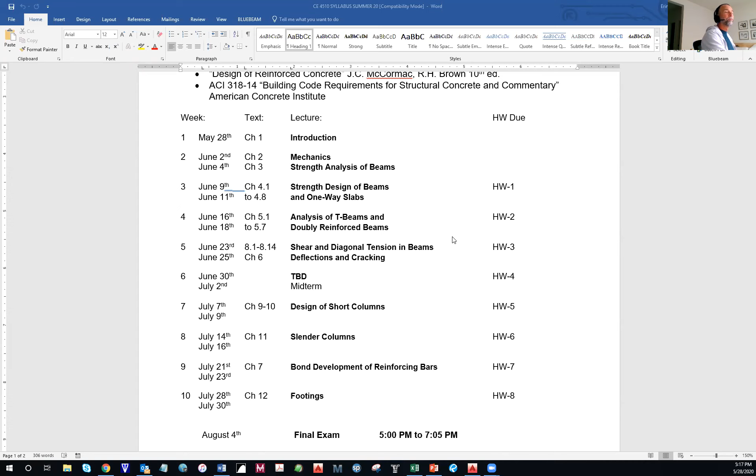So this is the homework schedule. The midterm is on July 2nd, and the final is on August 4th. These two dates don't slide - it will be on July 2nd, it will be on August 4th. So if you have family vacations or you're hoping to jump to Tahiti or something, just make sure you're not gone on these two days.

Okay, any questions so far? No, good. Okay, let's jump down here.

Okay, so the midterm, you have 2 hours to complete. The final, you'll have 2 hours to complete.

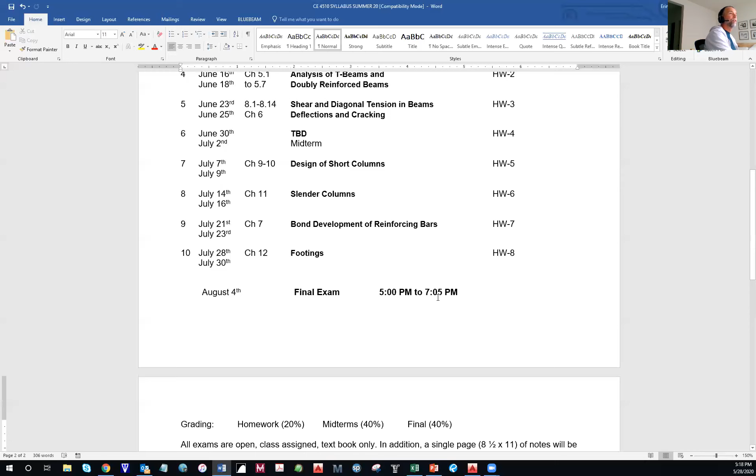Okay, grading for this class. We have homework, as I mentioned. The homework will be 20% of your grade. The midterm will be 40% - that's the only midterm, there's only one. And the final will be 40%.

Okay, so for the exams, they are open, class assigned, textbook only. You're going to be doing this in front of a webcam with Respondus. You're going to show me your desktop and what's there. And what can be there is your textbook or a printed out version of your textbook.

And a single page, 8.5 by 11 of notes will be allowed. The notes must be handwritten, no pictures, printed material, or examples allowed. It's basically just shorthand crib notes to help you find things during the test. Again, no pre-worked out problems, no examples, and definitely no printed material.

This note page that you're going to have, you're going to turn that in with your exam. Compromised tests will not be credited.

So what we did last time is I actually created an exam through Respondus, and the exam has PDF sheets that have the problems. And then the exam has text boxes that you put your answers in. I usually do 3 or 4 problems, and each problem has 1, 2, or 3 parts to it. So you give me the answers in the text box.

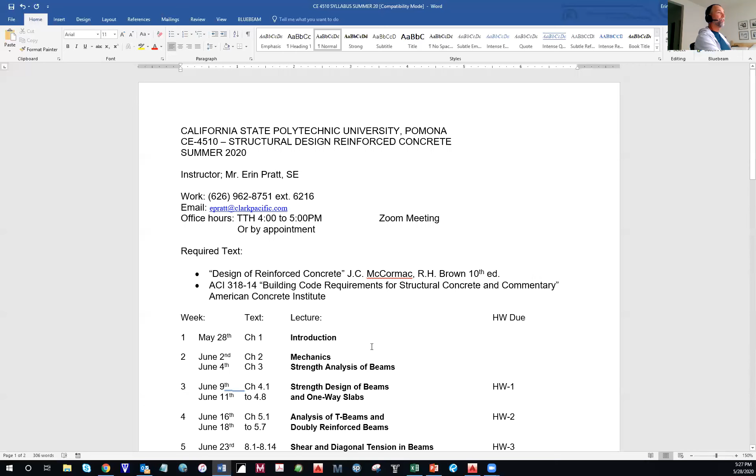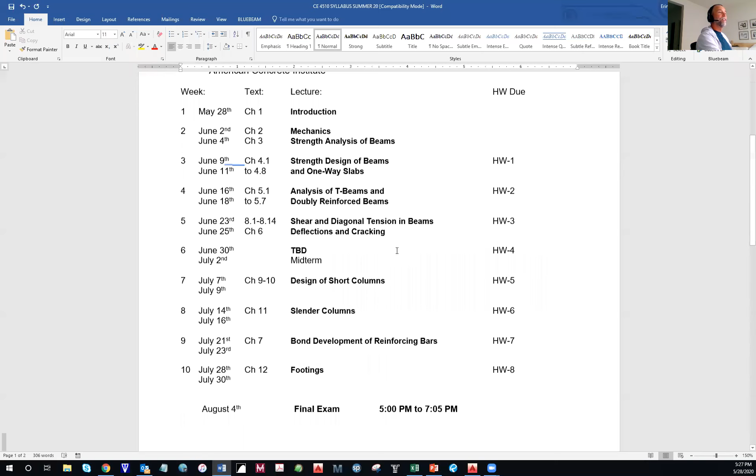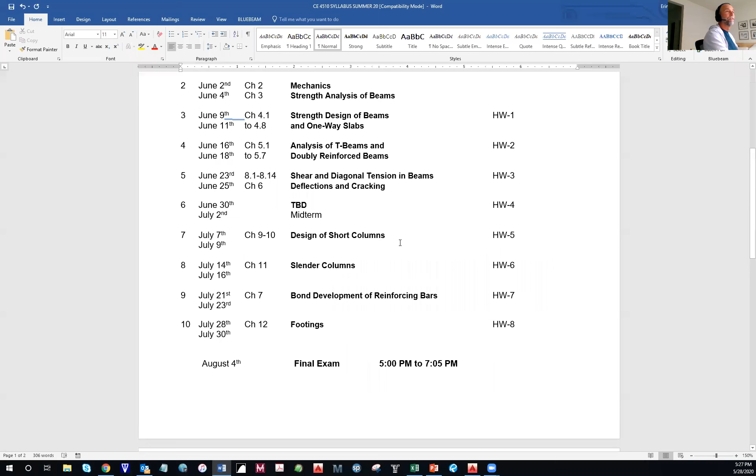Okay, so any questions at all about what we're doing? Okay, so that's the syllabus. If I refine some of the scheduling down here at the bottom, I'll repost this and let you guys know that it's been revised as we're moving along. But at least until the midterm, all of this is pretty set in stone.

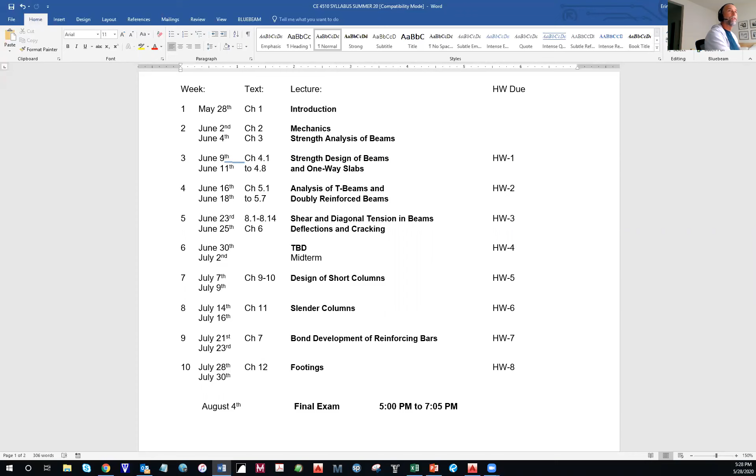Okay, so that's the syllabus. I think the way we're going to do this class basically goes from 5 to 7. I think what we'll do is go from 5 to 6, then take like a 10-minute break, and find a convenient spot to break. I'm going to try to work in a 10-minute break for the 2 hours, since 2 hours can be long if you just drank a lot of coffee or something. So does that sound good to everybody? A 10-minute break in the middle? Yeah, that's fine. Okay, great.

Okay, lecture number 1. I'm trying to think if I'm forgetting anything before we dive into concrete design. Well, I'll interrupt myself if I remember anything else. Okay, so lecture number 1: why are we here? We're here to learn concrete design. Today is just the fluffy, warm and fuzzy introduction before we really get into the good, interesting stuff. So starting as an introduction, we start with our materials.

Our materials are concrete. Of the concrete, we have 4 basic materials: sand, or otherwise known as fines; aggregates, or coarse aggregate; water, of course; and cement. Those are the basic 4 ingredients of all concrete designs. And in this modern day, more often than not, we'll see some admixtures added in.

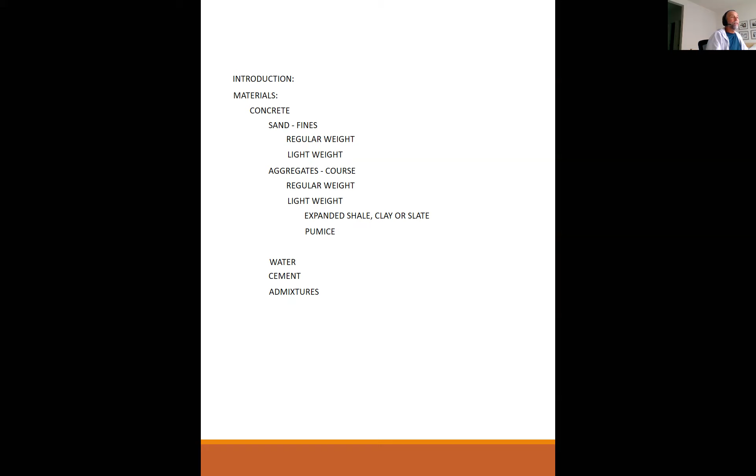That rock does have less shear capacity than regular natural rock. In other words, if you try to shear it, it will shear through the rocks themselves easier than with regular weight material. But there are pretty good advantages to using the lightweight material, namely the weight of concrete is dramatically reduced. We'll get into that a little bit later.

Water and cement together form what's known as a water-cement ratio.

The water-cement ratio is a very important concrete design item, but this is for the mix designs. I want to be clear that this is just background information right now. Mix designs are different than concrete design. This course is really going to be about concrete design, not mix designs. You may or may not have already had a concrete lab where you talked about concrete designs or mix designs, and that's where the water-cement ratio comes in. So again, this is just background information. As a structural engineer, generally you're not going to be too concerned about how the concrete achieves the properties you need. That's usually somebody else's problem, but this is how they do it.

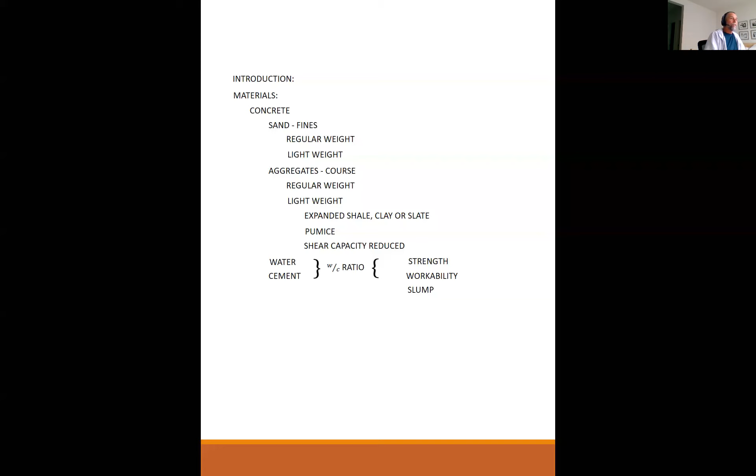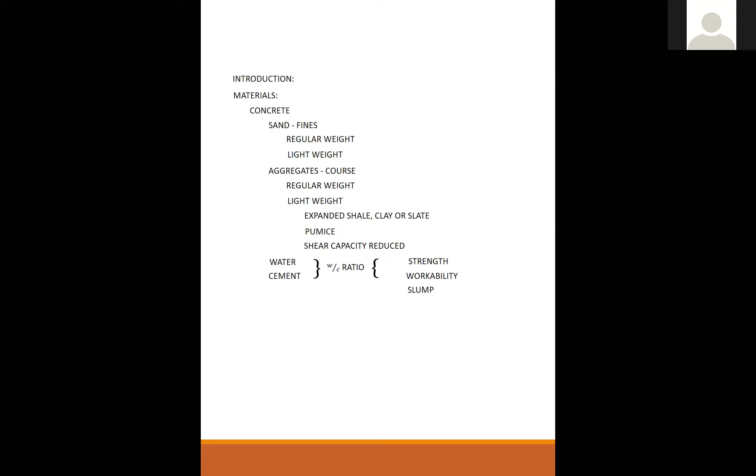Does everybody know what slump is? What does that measure? Isn't that the cylinder test where they put the concrete in, then flip it over, and see how much it goes down? That is exactly right. They have a cone that they use at the job site, and they fill the cone up with wet concrete.

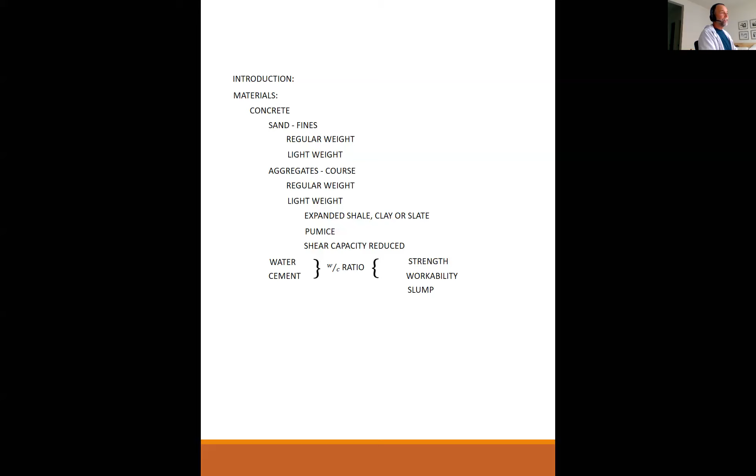They flip it over onto a plywood piece of board or something, then pull the cone off, put it next to the pile of wet concrete, and measure how far from where it started it slumped down. How far did it go down?

Some general numbers: 4 inches is a low slump, pretty high strength but low slump. 5 to 6 inches is kind of normal - I think you need about 6 inches to even pump concrete. Then 8 to 10 inches is more on the workable side; people placing concrete love it when it's 8 to 10 inches, that makes it really easy. More than 10 inches, I think you're pouring a sidewalk. And so that's the measure of slump.

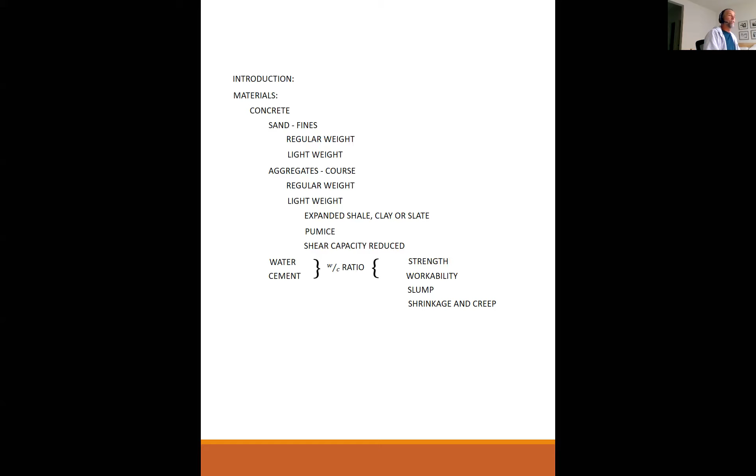The water cement ratio also will greatly affect shrinkage and creep. If you're pouring, say, a slab for a warehouse and you don't need a whole lot of strength, but if you get a lot of shrinkage, you're going to get a lot of cracking. So you might want to check that water cement ratio, not for the required strength, but just to put some control on shrinkage and creep.

Okay, any questions so far?

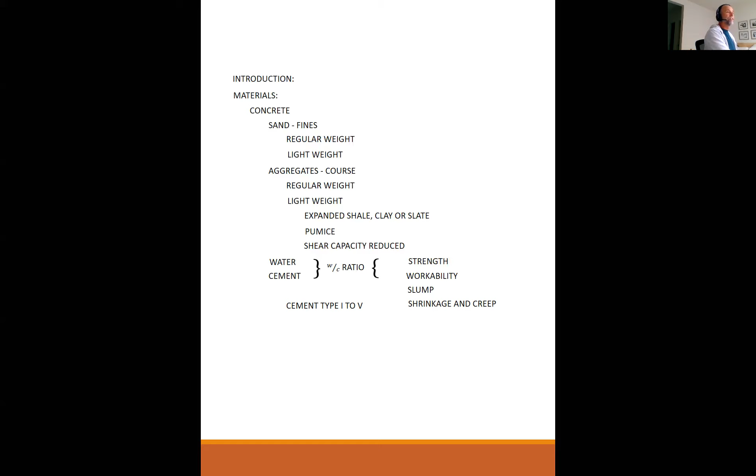Cement comes in 5 different types - these are ASTM specs for type 1 to 5. Type 1 is common all-purpose. Type 2 is lower heat of hydration than type 1, and it also offers medium sulfate resistance. Sulfate resistance, that is basically a chemical attack.

It is sulfates that are in the rock or in the aggregate or in the sand. What will happen is those sulfates, when mixed with the water, will cause problems down the line. They'll cause all kinds of micro cracking, and your concrete can literally just fall apart if it is susceptible to sulfate attack.

Lots of great examples - you can walk around older structures. There's a lot of it in downtown LA. In fact, if you drive any of the freeways going into LA, especially around LAX, I've noticed it a lot - concrete is just falling apart. Really, that was a sulfate attack over the last 30, 40 years since that was put in.

All you can do for sulfate is try to source better rock or better sand, but a lot of times that's not economically feasible because you have to use what's close to you. So your other option is to get a cement that has some sulfate resistance to it. That's another reason to use type 2.

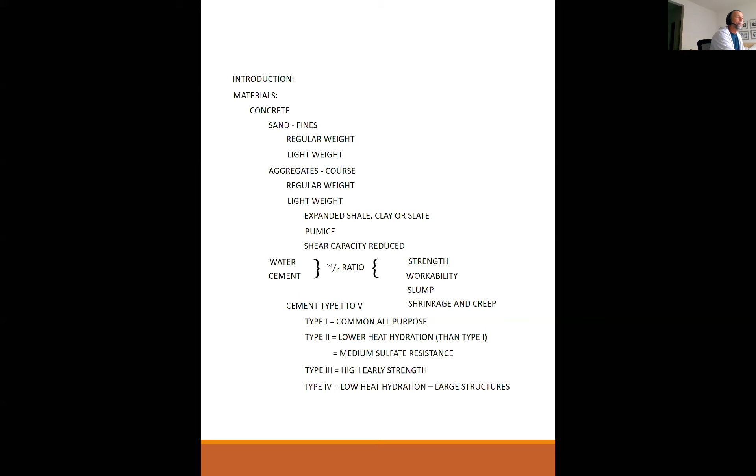Type 4 is low heat of hydration for large structures. Picture something like the Hoover Dam, where that was a massive structure - even with a low or high water to cement ratio, it still generated tremendous amounts of heat from its own chemical reaction between the cement and the water. That heat can actually get so hot that it's detrimental to the curing of the concrete, and you actually cook the concrete. There's different ways to attack that - one of them is using type 4 low heat of hydration cement.

And then type 5 is high sulfate resistance, the best sulfate resistance you can get. Any questions on cement type?

Again, this is just background information. You as a structural designer designing concrete structures generally would not worry about this stuff. This is something that the contractor would worry about, because if this structure is susceptible to sulfate attack, it's their name that's on the line. The customer is going to come back and say, hey, you built this thing and it's fallen apart. It's the contractor's problem, but the engineer should be aware of these issues as well.

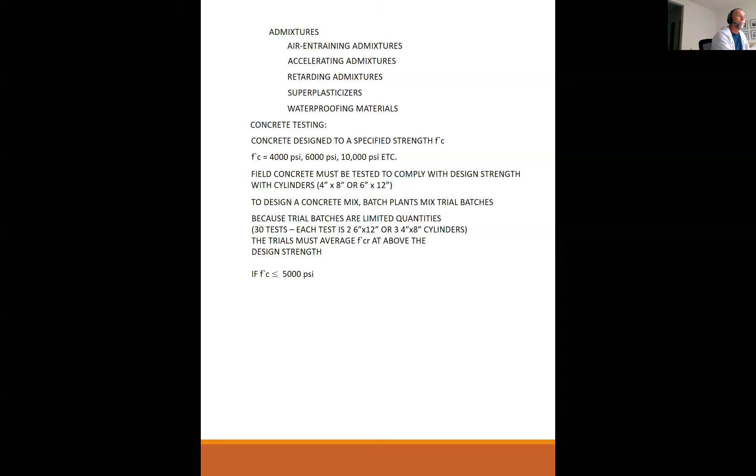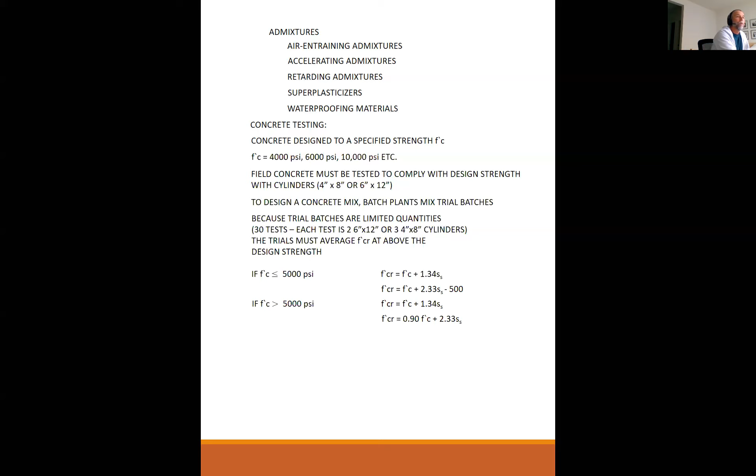Trial batches must average an F prime CR at or above the design strength. If your design strength is less than or equal to 5,000 PSI, your achieved average strength F prime CR has to equal the design strength F prime C plus 1.34 times S sub S - S sub S being the standard deviation of your data - or F prime C plus 2.33 S sub S minus 500. If your concrete is high strength, over 5,000 PSI, the criteria is F prime C plus 1.34 S sub S, or 0.9 F prime C plus 2.33 S sub S.

So the site testing is acceptable if... let me slow down. This is the requirement of a batch plant. Say I'm a ready mix company contracted to provide 4,000 PSI concrete. I will design the mix, then create 60 to 90 cylinders. I break all 60 to 90 cylinders, and the average of all those cylinders has to equal or exceed the greater of these two values, in order for my mix design to qualify as a 4,000 or 5,000 pound mix. Does that make sense?

Could you explain that again, please? Sure.

Somebody dropped out. There we are. Okay, absolutely. Okay, so again, you're the structural engineer.

You say, I need 4,000 PSI concrete, and that's it. You put it on your drawings, F prime C equals 4,000, and that's all you do. The batch plant that is contracted to provide the concrete has to prove before the very first delivery truck shows up that this mix design they've come up with will perform on the job. Because imagine how disastrous it would be to be pouring a 70-story building, you're 30 floors off the ground, and the concrete at the ground floor is not coming to strength. What a nightmare that would be.

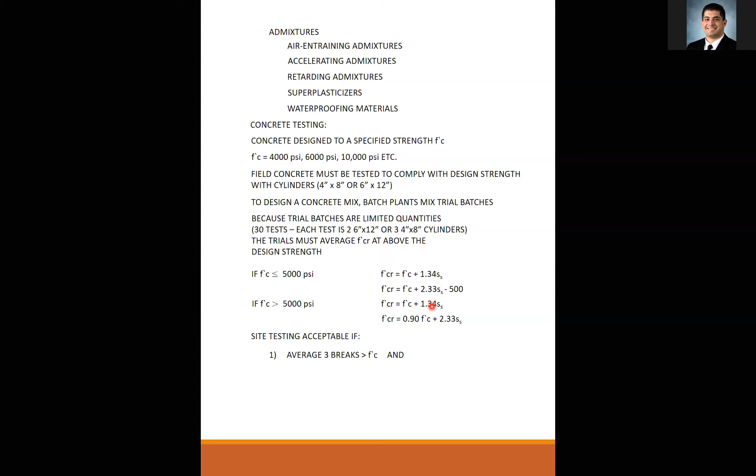Okay, thanks. Okay, so site testing now. Now we've moved from the batch plant, and the batch plant has their own quality control. Now we're talking about quality control at the job.

Now the trucks are rolling up to the job site, they're pumping the concrete onto the building, and we're taking cylinders from the actual job concrete. So the cylinders that you take at the job site, if you average 3 breaks greater than F prime C, and you have no one break that is less than F prime C minus 500 for less than 5,000, or no one break less than 90% of F prime C for greater than 5,000, then you're okay. Your concrete has made the cut for the actual job site.

And what happens if it doesn't? Does anybody know? Don't they do like a mock-up, not acceptable?

So what happens is QC, the deputy inspection at the job site, will write up a non-conformance. That's what it's called. They write up a little ticket and say, hey, we're looking for 4,000, and you had 2 breaks that were under 4,000. We got a problem here.

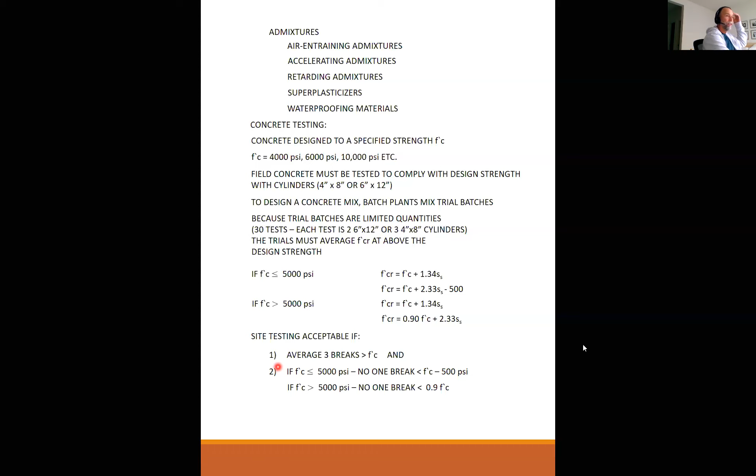And then what they usually will do is say, okay, let's wait till 56 days and see if it comes up. And if it doesn't come up - now this is pretty darn rare, thankfully, because of all this work we did up here - but things happen, it does happen. Accidents happen. Somebody double dosed the water, double dosed the super plasticizer, or it sat in the truck in traffic too long. Things will happen.

And so if you can't resolve the low strength or non-conformance, then it goes back to the engineer of record. That goes back to you or I as a structural engineer and says, we got 3,800, you wanted 4,000, can you make it work? And then it has to go there.

Professor, if it reaches that point, would you try to retrofit it, or would you try to destroy it, take everything out? Yeah, great question.

Now it kind of becomes the realm of the engineer, and each engineer, each firm, has their own policies on how to deal with it. It really becomes job specific. Like in this case, I could justify it at 3,500, we're okay. Or this is hidden in an area of the building, nobody's ever going to see it, so why don't we just pour some more concrete and thicken it up to make up for it? Or this is a very important architectural feature, you guys screwed it up, there's no way the architect's going to let you change it. Demo it out, get rid of it.

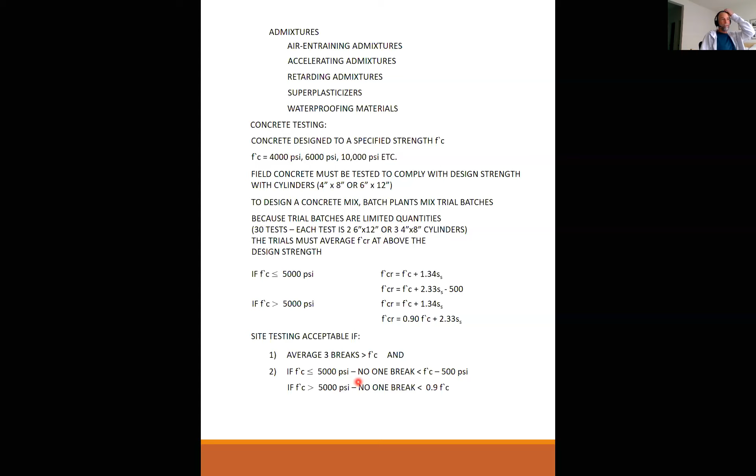There's a job in San Diego about 20 years ago where they were pouring a shear wall. They poured the shear wall, stripped the forms off, and you could walk up to the wall and look right through it because there was a giant rock pocket about 10 feet long and about 12 inches high, just like a big giant seam of no concrete. Of course, the contractor went begging to the engineer of record, please, please, let us patch it, can we grout it, can we re-pour it, what can we do? It was a shear wall, a structural wall for earthquake resistance. The engineer said no, this is worse than I've ever seen, tear it out. They had to jackhammer out this entire wall, 2 feet thick, 40-50 feet tall, 50 feet long. Had to tear it out. So it does happen.

Okay, any other questions before I move on? Okay.

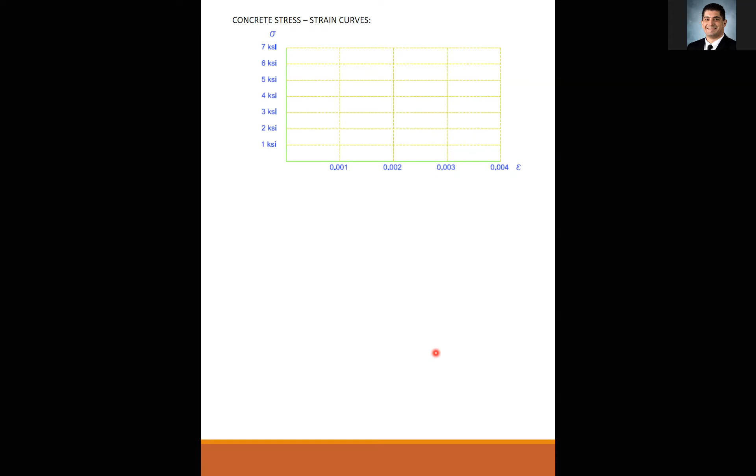Professor, I have a question. Just to clarify, on the site testing acceptable, where it says f prime c is less than or equal to 5,000 psi, and then it says no one break, is that referring that there's no breaks under that psi?

Okay, let me clarify. For every set amount of yardage that you pour, I'm not sure of the exact number, say every 75 cubic yards of concrete poured, you have to take 3 cylinders, break those 3 cylinders, and record the results. Say you want 4,000 PSI concrete and you got 42, 48, and 43. No problem, all 3 breaks are above 4,000, no issue, they write it in the report.

But let's say you had 38, 42, 46. The average of 38, 42, and 46 is still over 4,000, so we're okay with the average. But that one break was 38, still higher than 4,000 minus 500, which is 3,500. So if the average is better than f prime c, and you didn't have any single break less than f prime c minus 500, then it is acceptable.

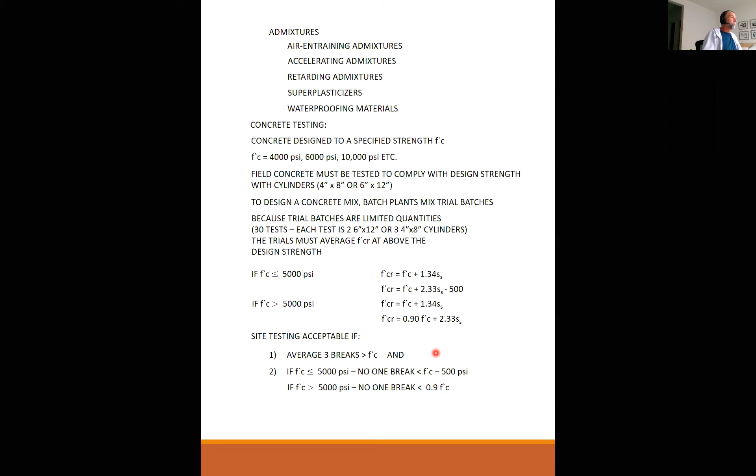Let's take another example. Say you took your 3 breaks and got 32, 48, and 53. That tells me something's wrong, that's so across the board. The average of 32, 48, and 53 may still be over 4,000, but you had that one break less than 3,500, 32 being less than 35, so it is not acceptable, and that would be a nonconformance. Does that clarify? Yeah, thank you.

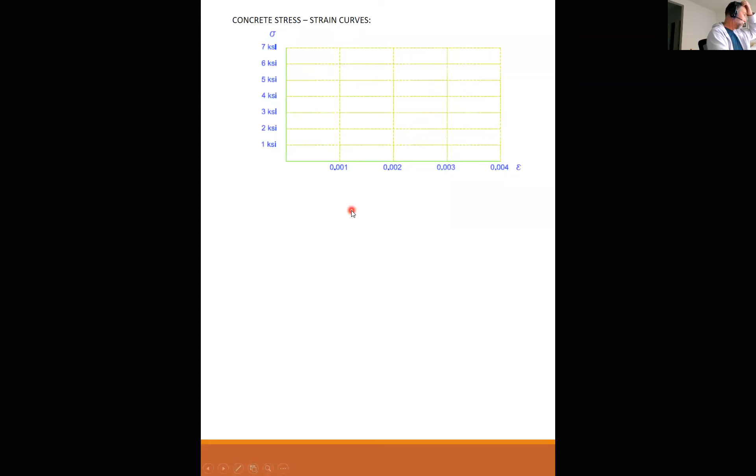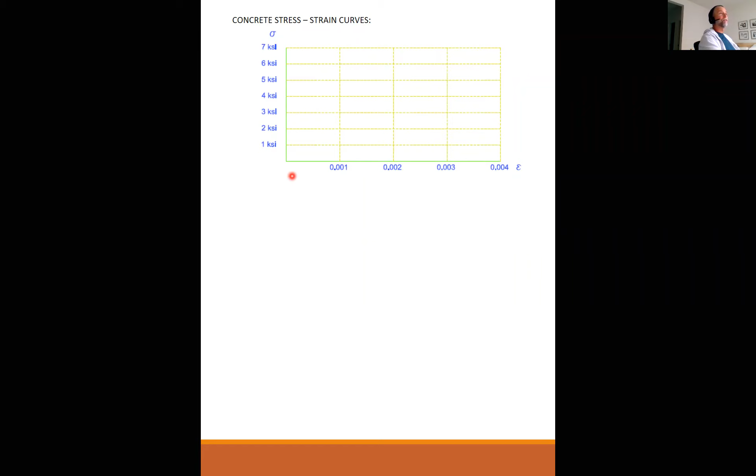So now what we're going to pick up here is we're going to talk about concrete stress strain curves and how the different flavors of concrete look on this. You probably remember this from your mechanics of materials, where we did stress and strain, and it's very useful for looking at the behavior of materials.

So if I start with a fairly low strength concrete, relatively, so an F prime C 3000 PSI, it peaks, as you can see, about 0.002 is your maximum strain on this, but it will strain out pretty far before it actually crushes. So at 3000 PSI, concrete is somewhat softer, and it actually is a bit more ductile, but it's much lower strength.

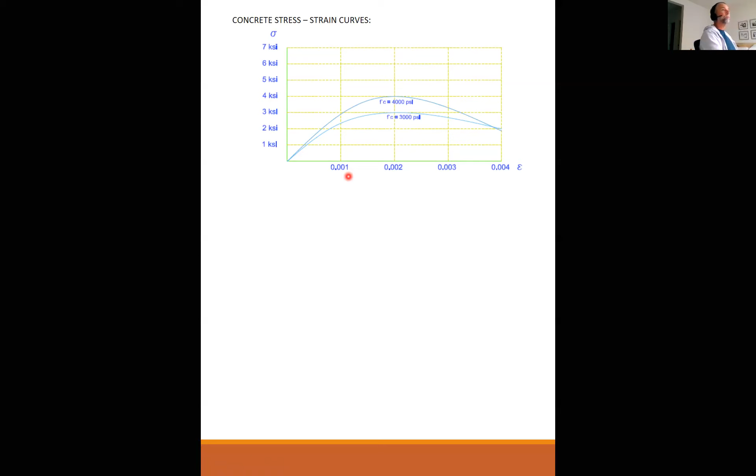You can see the trend here is if I go to 4000 PSI, again I'm kind of peaking out at about 0.002 inch per inch, but it's dropping off a little quicker now. And 5,000 and 6,000, so you can see the trend is that the higher the strength the concrete is, the less strain is available to you. So there are actually some downsides to using some really high strength concrete. 8 or 9 or 10,000 PSI concrete may not be as ductile as some of these softer concretes. Also, what is the note here is the 0.003.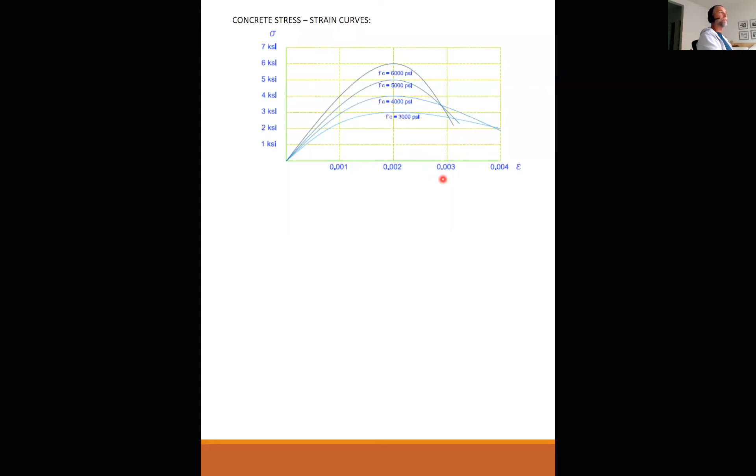This is going to become an important parameter down the line. ACI 318 is going to limit our usable strain to 0.003. Even since some of these softer concretes can go way beyond 0.003, that is the one limit chosen by ACI to apply to all concrete. And you can see at 0.002 is where most of our concretes kind of peak.

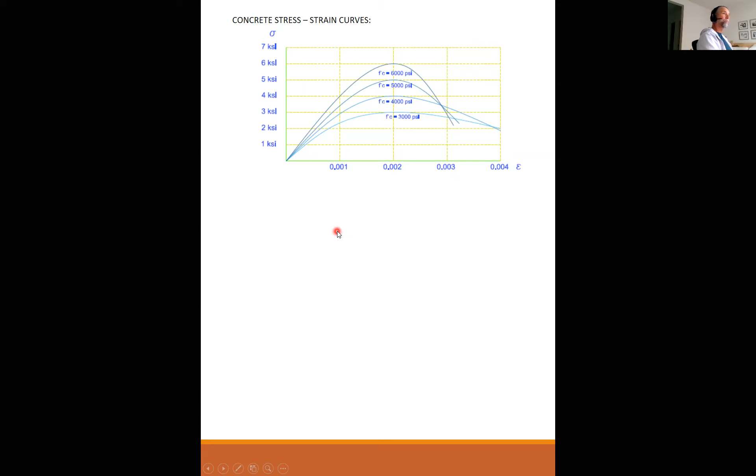These are loosely defined, but we generally will accept that the elastic range for concrete is up to about 40% of its strength. This is where the line is pretty straight, and we can solve for serviceability issues, deflections, cracking and stresses, things like that. As long as we're in the elastic range, then moments of inertia and Young's modulus of elasticity are all valid in this range.

Beyond that is what we call the plastic range. And the plastic range is just that - the concrete is not acting in a linear fashion. It's acting in a nonlinear fashion.

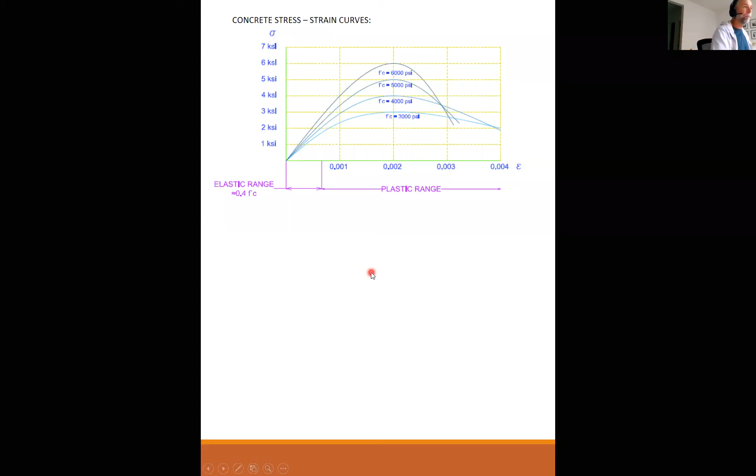Epsilon sub naught is how we pronounce this little guy, or that's how I say it. Epsilon sub naught is taken to be about 0.002 for all these strengths. That is where the concrete peaks.

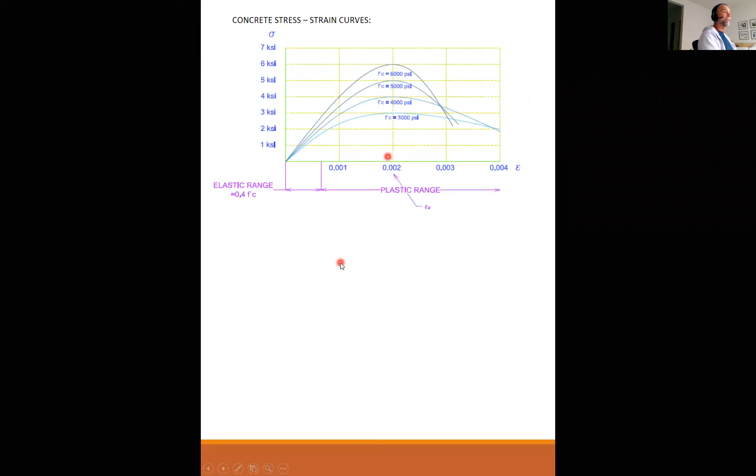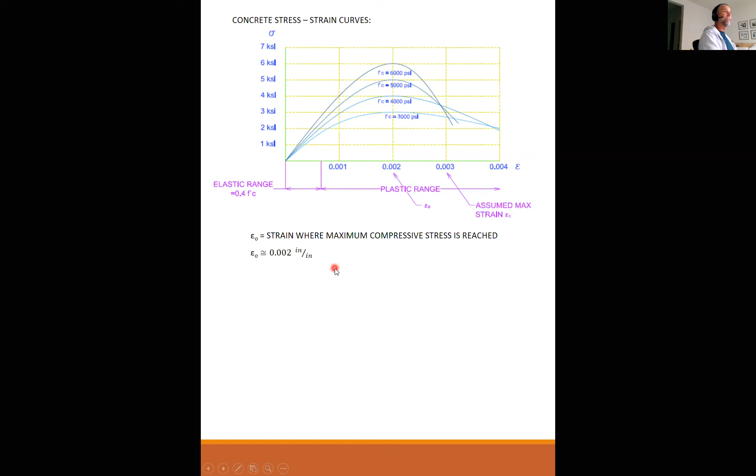And like I said, the assumed maximum strain, epsilon sub c, is dictated by ACI code, is 0.003. And this actually can vary a little bit. The Canadian code and the European code, I think they'll let you go up to 0.0035. It doesn't really make any difference at all. It barely changes any of the answers. So it's kind of arbitrary, but it works at 0.003.

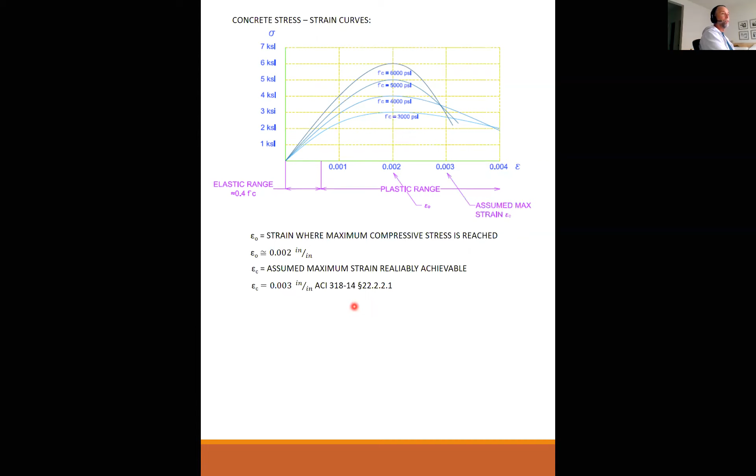And again, throughout this course, I am going to be citing to you chapter and verse where you can find these things in the ACI code. So ACI 318, and you can find it chapter 22, section 22.2.2.1.

Which types of cement behave this way? Do all types? Yeah, all 5 types really don't change this behavior at all. The 5 types have those other properties that we talked about. And if it's high early strength, what's not shown on this graph is how many days did it take to get to this strength. But high early strength will get to this strength earlier. Retarded concrete will get to this strength later. But after 28 to 56 days, it doesn't really matter anymore.

When you put this in an actual compression testing machine and squash that cylinder down, what you're doing is you're measuring the stress with the strain. And so this would be like a test representative of one day - this is all one test. You tested it from zero, it went up, up, up, up, then it started dropping, dropping, dropping, and it crushed.

Okay, any other questions so far?

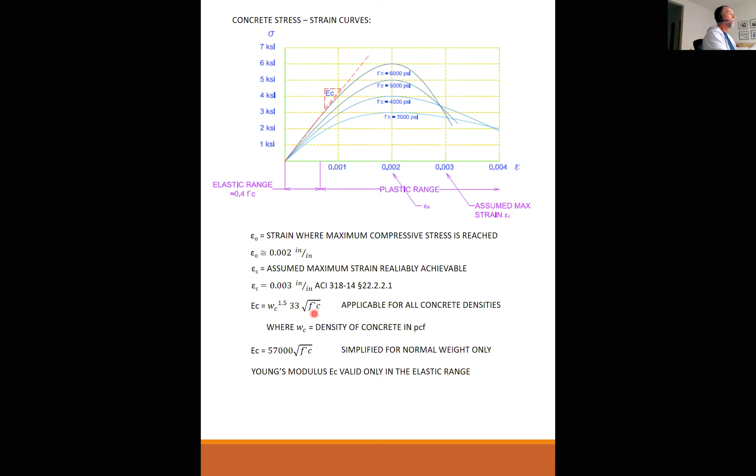We're going to see square root F prime C over and over and over in this course. It's an indicator for many different things that we are designing to, like at what stress will the concrete rupture or crack, at what stress will the concrete fail in shear. It's a very valuable tool.

But the problem, and I just want to put this out right up front, is that F prime C is usually PSI, but you can't take the square root of PSI. So anytime you see the square root of F prime C, first of all, the number you put in here has to be PSI, always. You cannot use KSI. The square root of 4 KSI is not the same as the square root of 4,000 PSI. Mathematically, you can't just take the answer and then multiply times 1,000. It's not the same answer.

So anytime you see the square root F prime C, always, always, always put in the PSI value for F prime C. And then the units that come out of this are PSI. So this is going to be 57,000 times the square root of 4,000, say. That answer will be PSI. And to go from PSI to KSI, you just divide by 1,000. But when it's 57,000, this is PSI. Okay, does that make sense to everybody?

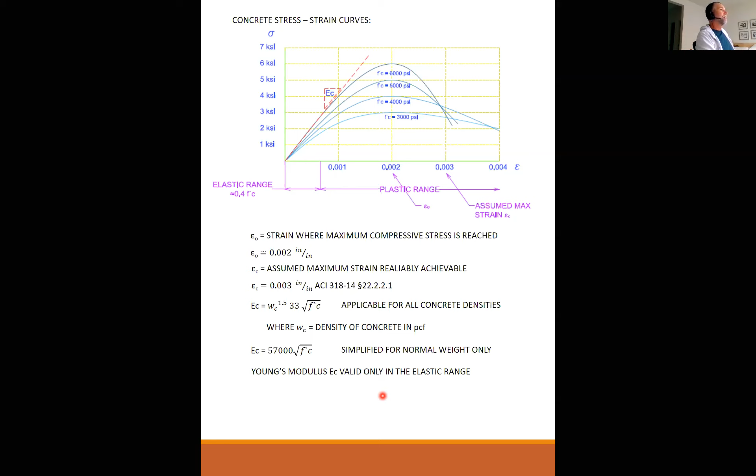Okay, so if I should back up a second, just make sure everybody's on the same page. Is everybody familiar with a kip? A kip is a very common designation of force in the structural engineering world. So a kip is 1,000 pounds or a kilopound, yes. Okay, so that means that KSI is kips per square inch. And so 1 KSI is equal to 1,000 PSI. And we're going to use those units back and forth like a billion times in this class, or a million K times, whatever.

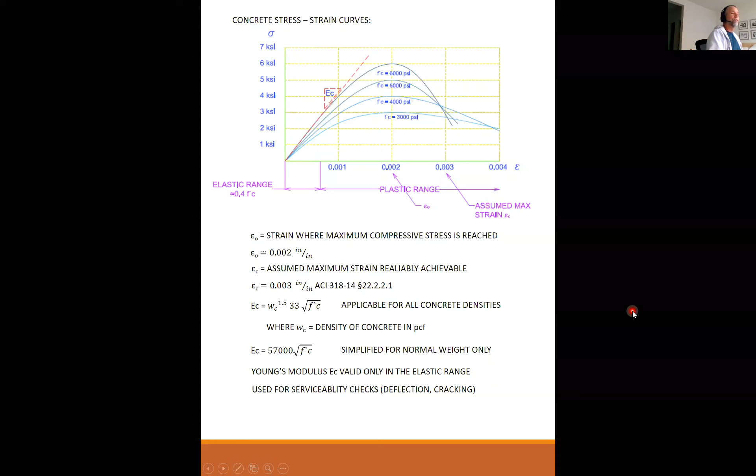Anyway, so Young's modulus, valid only in the elastic range. It is used for serviceability checks, deflections, and cracking. Concrete strength is designed based on the plastic range of concrete stress.

Okay, creep and shrinkage. Creep and shrinkage is a property of concrete and water. Creep and shrinkage are both the expulsion of water from the cement matrix. So you poured the concrete, you had a lot more water in your mix than you actually need for the hydration of cement. You need a lot more in there for workability and to get it into the forms and vibrate and consolidate and all that.

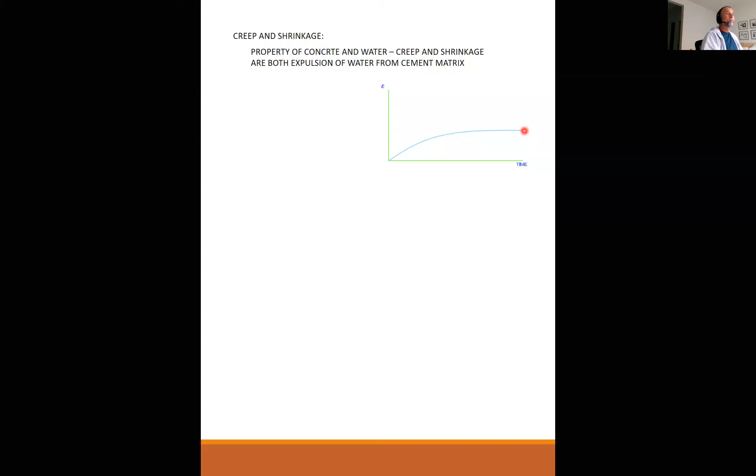So there's extra water in the concrete mix as it's curing. Well, that extra water is going to want to come out, and it comes out over time. So the expulsion of water from the concrete mix starts off rather dramatic, and then eventually over time descends to basically no more at all. So like a horizontal asymptote. And this is for both shrinkage and creep.

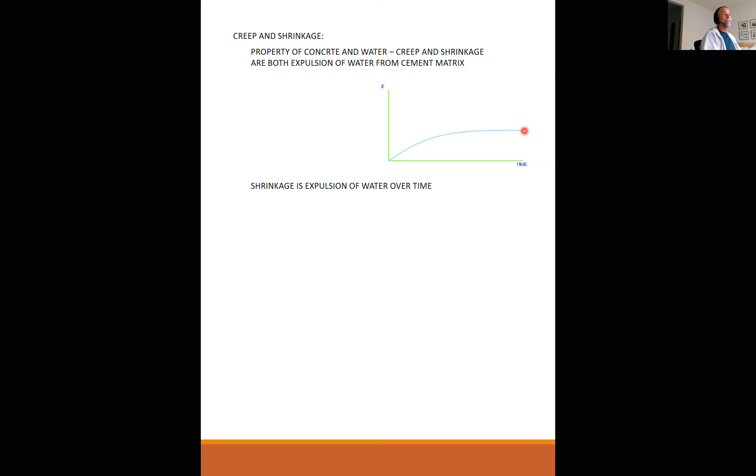So shrinkage is the expulsion of water over time with no other factors involved. You pour the concrete, there it is, and over time, water is going to come out of that concrete into the atmosphere. And it creates a reduction in volume. The concrete will shrink because you're losing a volume of water to the atmosphere. So the concrete itself actually will shrink.

And most concrete is restrained in some way. So as it's trying to shrink itself, something is going to try to restrain it from shrinking, and it's going to crack. So I'll just say it right up front, so nobody's surprised. All concrete cracks. All concrete structures crack. Cracks are not evil. They're not the end of the world. All concrete will crack. What we do in our jobs is we control the cracking, okay?

So think of it like a slab on grade. Think of pouring a patio or pouring the concrete in your garage. When you pour that concrete, you pour it up to the forms to a certain size. We do everything we can to slow the shrinkage down. We cover it with plastic, or we soak it in water. We do whatever we can to slow down the shrinkage.

But inevitably, water is going to come out of that concrete into the atmosphere, and that slab is going to shrink. Now, that slab is not free to just shrink as much as it wants. There's friction between it and the ground. Or it may be tied into walls, or it may be in some way restrained. And that's where you get cracking in your floor slab.

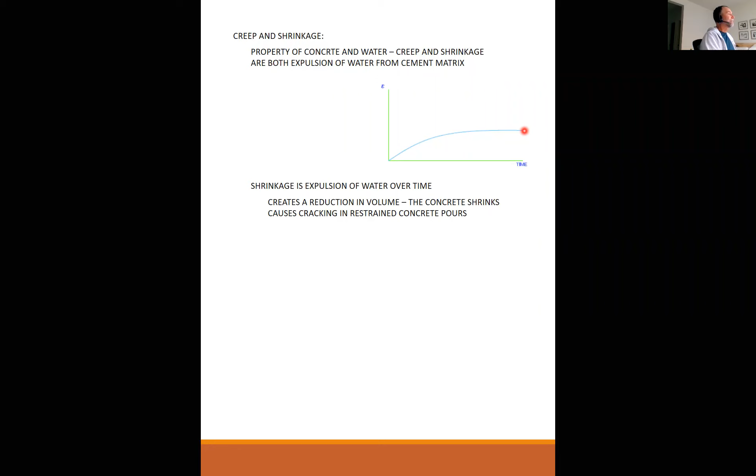So what's the difference between shrinkage and creep? Is there a difference? Well, creep is really the same phenomenon as shrinkage, but we separate it into two parts. The reduction in volume of concrete because it's being squeezed under stress, we call that creep. The part of the reduction in volume that is not from being squeezed, that's shrinkage. So creep is the expulsion of water under constant stress.

Creep causes an increase of strain under constant stress. That's the key right there.

If you think back to the stress-strain diagram I showed you for the various concretes, you can stress a concrete up to 2,000 or 3,000 psi, and it causes a strain. Every stress causes strain, so the concrete may strain. If it's a beam, it deflects. If it's a column, it squishes down.

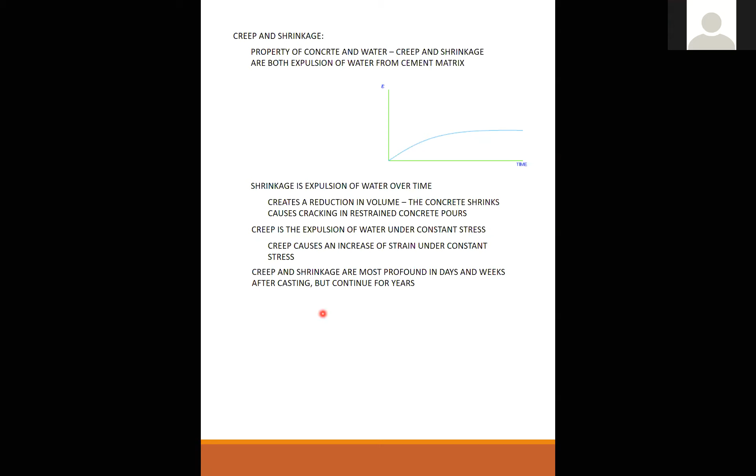Professor, do we combat that by using pre-stressed concrete? We can. That's one way to combat that. If you're having too much deflection, you can use pre-stressing.

You can also specify higher strength concrete that has a lower water to cement ratio, and you'll get less creep. Additionally, we also have some other tricks where we can put some steel in there to help control that as well. As I said, creep and shrinkage are most profound in days and weeks after casting, but will continue for years.

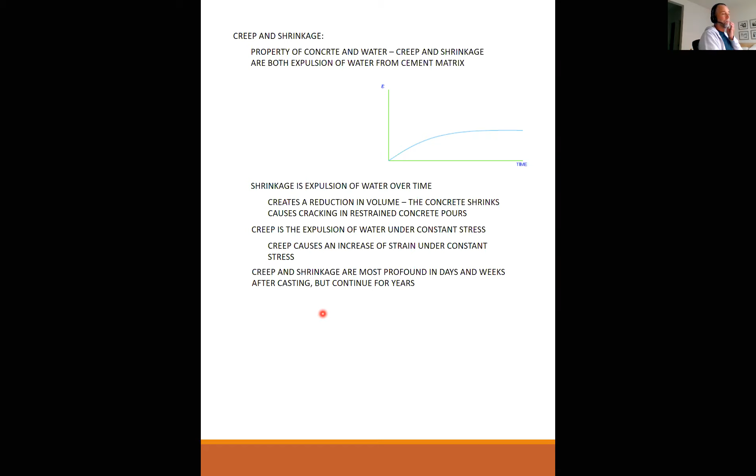Okay, concrete tensile strength. In concrete design, compression is positive, tension is negative. This is the first big 'oh my gosh, what are you doing to me' moment. I know, because I just taught mechanics of materials, where it's the exact opposite: tension is positive, compression is negative. In concrete design, it is the opposite.

So if you have 3,000 psi stress in your concrete, that's compression. If you have minus 400 psi, that's tension. Okay, so everybody straight up on that?

Professor, why does the change happen? Why? Why did we do this to you? Why are we so evil?

It's tradition. Really nothing more than just tradition. Reinforced concrete design has been around over 100 and something years now, and the tradition has been that we design the concrete to take compression and we design the steel to take tension. That's how the two materials work beautifully together. Concrete is great in compression, steel is great in tension. So we're always designing concrete for compression, and almost always designing steel for tension.

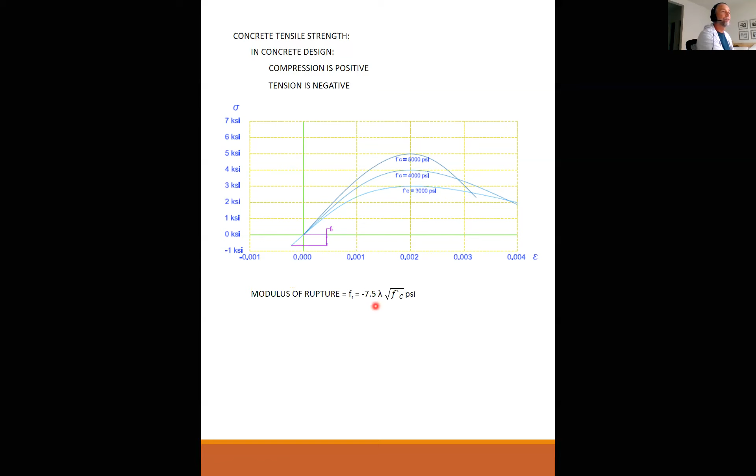So there's a limit of how much tension it can take until the concrete cracks, and that is F sub R. F sub R is known as the modulus of rupture, and it's generally taken as minus 7.5 lambda times the square root of F prime C. It's minus because concrete in tension is negative. Lambda is a factor less than 1 to account for lightweight concrete.

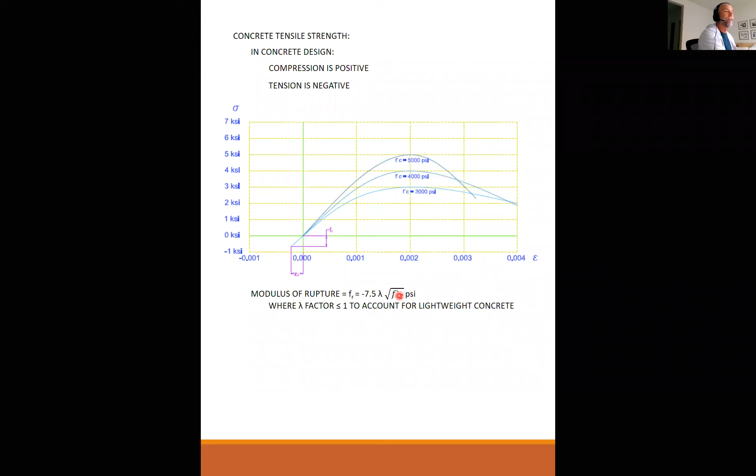And F prime C, like I said, F prime C goes in here. And then epsilon sub R is the modulus of rupture, occurs at epsilon sub R, which is the modulus of rupture F sub R divided by Young's modulus. And it generally is anywhere from 0.00009 to 0.00015.

Okay, I got a question explaining modulus of rupture again. Okay, so...

Picture this: if I have a cylinder of concrete, one that was made for crushing, one you're going to compress until it crushes. But say I could take that cylinder of concrete and pull it apart, put it in tension. Well, that cylinder of concrete is not going to just instantly crack and fall into two pieces. It's going to take some force before it separates at a crack. In other words, you could not hold a 4x8 cylinder in your hands and pull it apart. Well, at least I've tried it. I can't do it. So there's some strength in the concrete in tension.

And that limit is the modulus of rupture. If I have less than this number of negative tensile stress, then the concrete won't crack. If I exceed this number, then the concrete has cracked. Does that make sense?

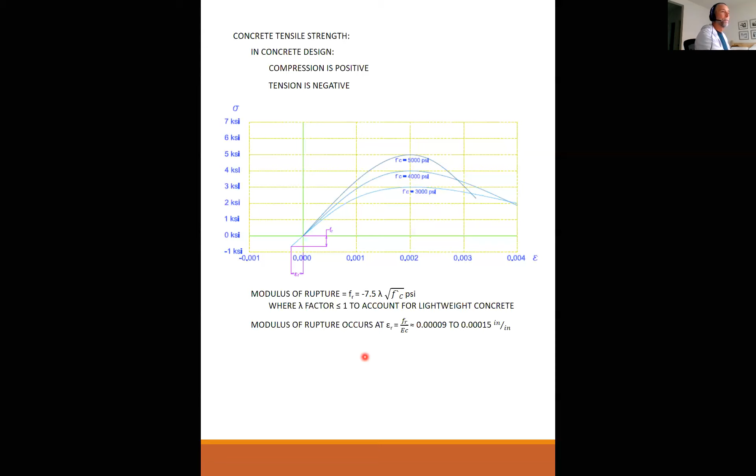Okay, they still have that? Yeah, but not exactly. It's not the force, it's not the strength, it's the stress.

And remember that stress is, force is stress times area. I'll be super clear. I know I'm being picky, but it's going to come back and bite you later if we're not clear about this. Stress and force are totally different. One is pounds, one is pounds per square inch. So a force times area, or a stress times area, is equal to a force. So if you take a cylinder of concrete and you try to pull it apart, you're putting a tensile stress in there, and it can only take so much stress until you exceed the modulus of rupture. Modulus of rupture is a measure of stress. And when you exceed that, it will crack and fall into two pieces.

I'll get to lambda in a second. I will elaborate on lambda.

Okay, concrete shear strength. Actual shear strength is very difficult to measure in concrete. Actual shear strength does not control design. Concrete is weaker in diagonal tension than shear and will fail in tension first. So anytime somebody says the concrete failed in shear, it didn't actually fail in shear. We'll get to that in much more detail when we get to shear design, but just a property of concrete: it hardly ever actually fails in shear.

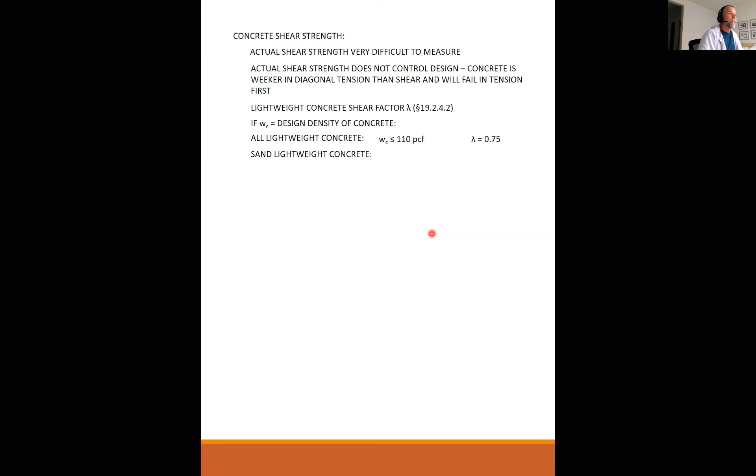If it is sand lightweight concrete, and I know you would think, wait a minute, lightweight sand? No. What this means is regular weight sand, lightweight aggregate. So sand lightweight concrete is regular sand, lightweight aggregate, and it is actually what most people are referring to when they say lightweight concrete. Sand lightweight concrete is anywhere from 115 to 125 pounds a cubic foot, and lambda is 0.85.

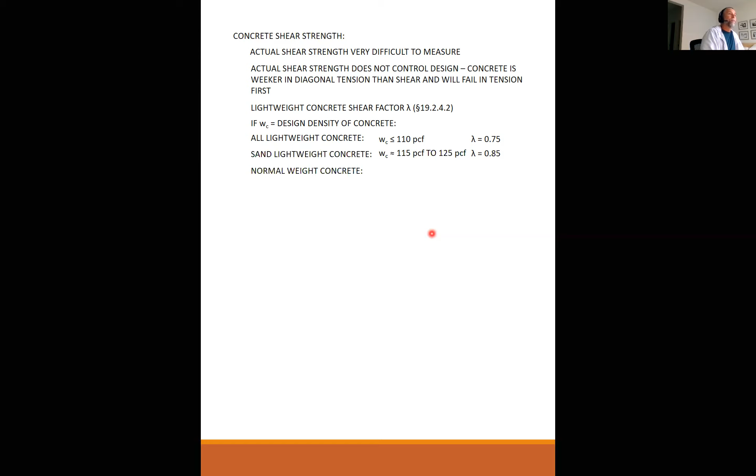And then you have normal weight concrete, normal sand, normal rock. The weight is usually 145 to 155, depending on the density of your rock, and lambda is 1.0. So if you have normal weight concrete, lambda just becomes 1 and kind of goes away. Linear interpolation can be used between the classes.

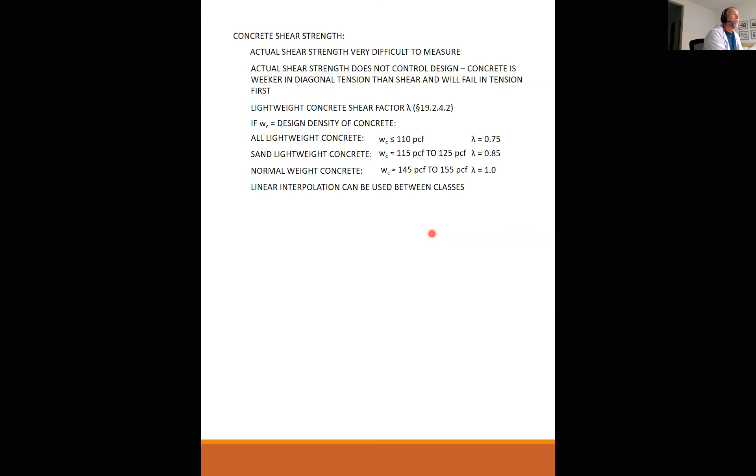Okay, everybody good on concrete? Okay. Yes, do I have a question? Nope, just saying I was good.

Sorry. Okay, all right, so let's move to the reinforcing steel. This is the other half of the beautiful partnership between steel and concrete, that is reinforced concrete. Reinforcing steel is manufactured under a specification covered by the American Society of Materials and Testing, and I'm not going to spell that out again—it's always just ASTM. And so we have these different flavors: we have ASTM A615 rebar. It comes in grades 40, 60, 75, and 80, and it is known as plain carbon steel.

There was a time when grade 40 was the norm and grade 60 was the high strength stuff. That stuff was expensive, and that was about 30, 40 years ago. Then there was a time when you could still get 40, but 60 was pretty regular - that's pretty much when I started this whole game. Now, 75 is almost impossible to get, 60 is the norm, and 80 is pretty easy to find.

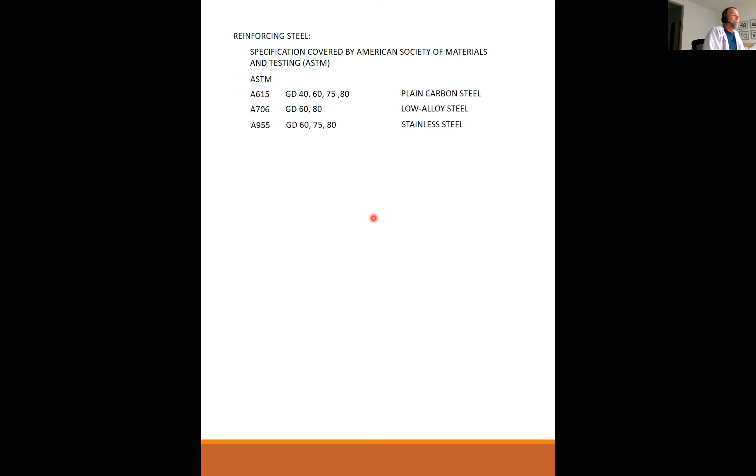We also have this stuff called A955. It comes in grade 60, 75, and 80, and it is stainless steel. In my career, I've seen it used maybe twice. You might as well be welding pure gold ingots inside of concrete - this stuff is so expensive. There's almost always a better way to do it than to use stainless steel, but there are certain applications where it's specified and you have to use it. This is the spec and these are the yields available for using stainless steel.

Professor, why did they use it in those two cases? It's so expensive - remember. The one I specifically recall was for a double T we made.

It's a precast double T, like a floor member, that was being used as a bridge at the Hyperion wastewater treatment plant for Los Angeles. If anybody knows what they do at Hyperion, that is some nasty, very caustic stuff. Just about any concrete they put into this facility destroys itself in 5 years. So they wanted to try precast because precast concrete generally has higher quality than site cast concrete, and they made us use stainless steel for everything.

I've never gotten a call back, and that was about 20 years ago, so I assume it's still there. That's why we use stainless.

And we have this new stuff, this newfangled technology called A1035, and it only comes in grades 100 and 120. This is actually a chromium alloy steel, some super high strength stuff. But one, you can't weld it. You just get all kinds of underbead cracking if you try to weld grade 100, 120 chromium steel.

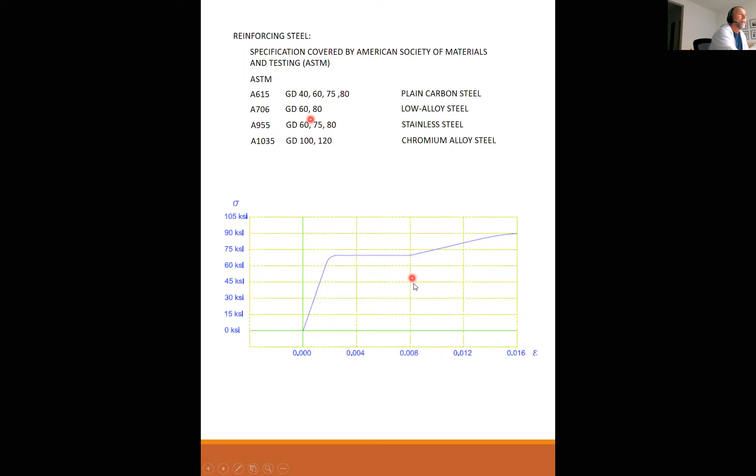This is very typical of what you might see for a real rebar test. The minimum specified for 60 KSI is here. This particular might yield at 72 KSI, which is perfectly fine. As long as it yields at or above the specified 60, then it meets the criteria for the rebar.

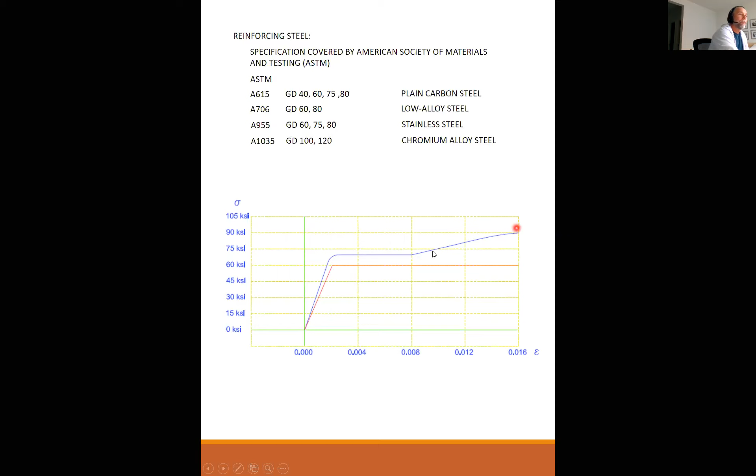And so this is what it might really look like. The red line is how we're going to design it. So for our design purposes, we're going to simplify this.

We're going to call from 0 to the yielding strain the elastic range, where you can determine what the stress is in the rebar using Hooke's law. Hooke's law is that the strain times Young's modulus is equal to the stress. So we can use that relationship to solve for the stress in this range.

But if you're in the yielding range, then the stress is just assumed to be the yield stress, or 60 KSI in this case.

And then we have the strain hardening range, where the steel gets tired of just yielding and puts up its last fight and gains more strength. Strain hardening, for the most part in concrete design, is ignored. It's conservative, but we're just going to ignore it altogether. And we're just going to assume that our rebar yields forever, and that the strain in the steel will never be your limiting value. It will always be the concrete that's going to fail first. So this is kind of the real behavior, and the red line is what we're going to assume.

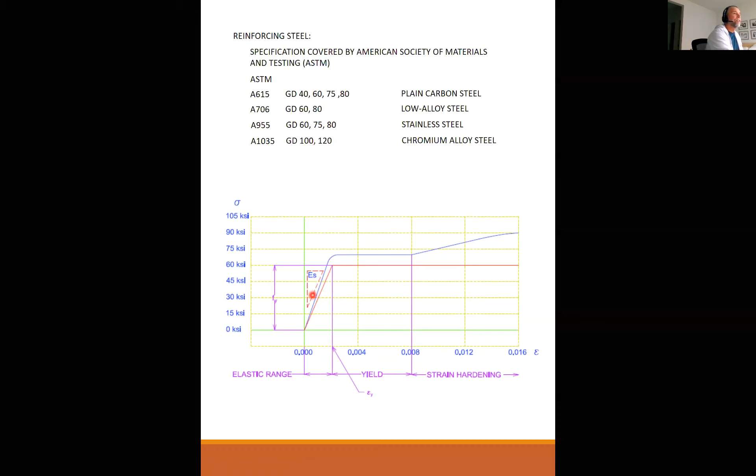Okay, I think what I did here is I'm going to say in writing what I just said. The blue line represents the possible actual rebar stress strain curve. Real curves can vary significantly from this ideal. That's another reason why we don't use this curve. Different rebars of the same ASTM spec have very different curves. They all yield at least 60 or above, but the shape of the curve can be very different.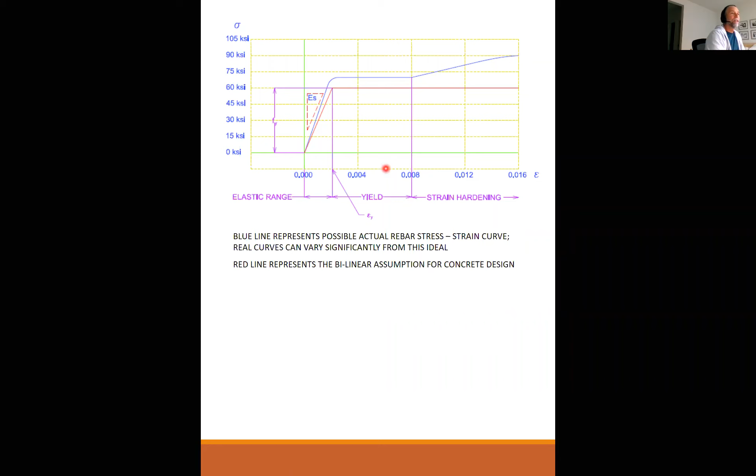The red line represents the bilinear assumption that we're going to use for concrete design. It consists of two segments, the elastic portion up to the yielding strain, epsilon y, and the flat yielding portion from epsilon y to an infinite strain. Again, we don't put a limit on the strain for steel because we know that's not what's going to fail. The concrete will always fail first.

E sub s is taken to be 29,000 KSI, and this is for all grades of rebar. The yielding strain, by Hooke's law, is equal to the specified yielding stress divided by Young's modulus. And for grade 60 rebar, if you plug in 60 here, 29,000 here, you get 0.00207 inch per inch. And that's going to be a very typical value that we're going to use for this class.

Although ACI 318-14, hereafter referred to as the code, does not prohibit using various grades of rebar, it does limit the design value used. You should have a copy of ACI 318-14, because I'll reference it many times, like table 20.2.2.4a on page 329. That table prescribes what yield stress may be used in various conditions. Higher grades may be detailed, but the design is limited to the grades from the table.

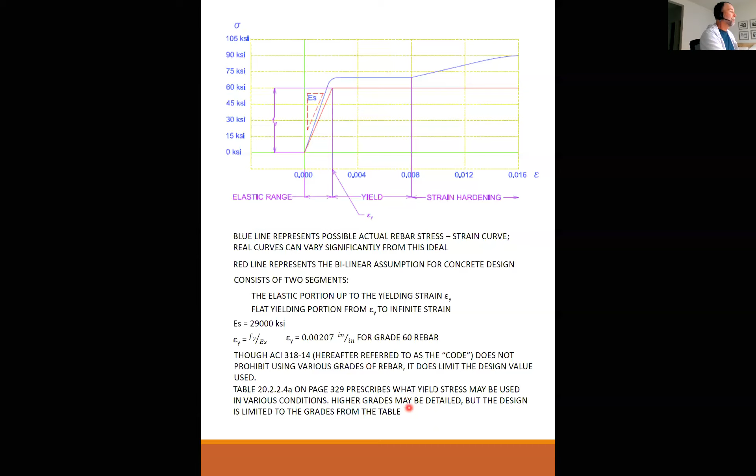For example, you may specify shear ties in a beam as A706 grade 80. Fine, they'll provide you with grade 80 ties, no problem. But this table says in your calculations for the strength of that beam in shear, you can't use anything higher than 60. So even though it may actually be 80 or 100, you can't design any higher than what this table allows. It's a fairly complicated table, so I couldn't reproduce it in this presentation. Another good reason why everybody needs the code so we can look at these things as we go through these slides.

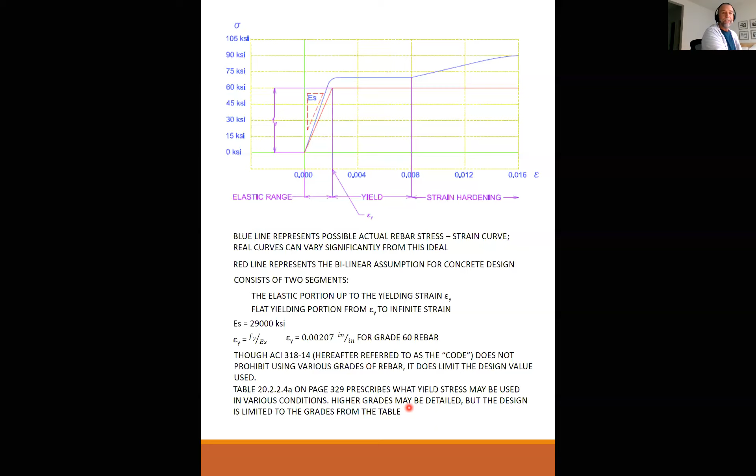Reinforcing steel, hereafter referred to as rebar.

I happen to be on the AWS, American Welding Society, D1.4 Code Committee, the Rebar Welding Committee, as one of my hobbies. We've got people on there who are so picky that if you even say 'we're going to weld the rebar,' they'll say no, no, that's reinforcing steel, give it up dude, it's rebar.

So I try to be specific, and then I'll say little things like this—it's not necessarily slang, but most of us call it rebar, even though technically it's reinforcing steel.

Rebar sizes are standardized. Every mill has their own molds for casting rebar, and a number 11 bar from Tamco will not look exactly like a number 11 bar rolled out of Cascade, but they have properties that are standardized: one is diameter, another is area, and a third is weight. The sizes can be found in table 1.1 on page 25 of the text, as well as Appendix A on page 507 of the code.

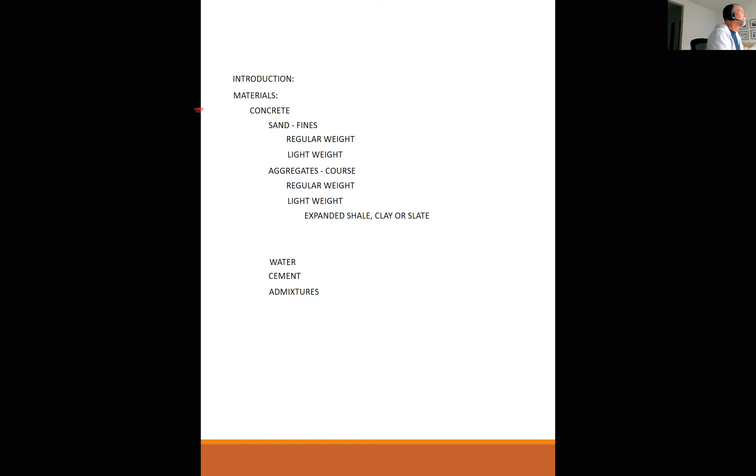The tool we have here for annotation, I'll show you the example. If somebody has a question, this is my tool for answering anybody's questions. And this tool is awful at best. I can barely even write my own name, as you can see.

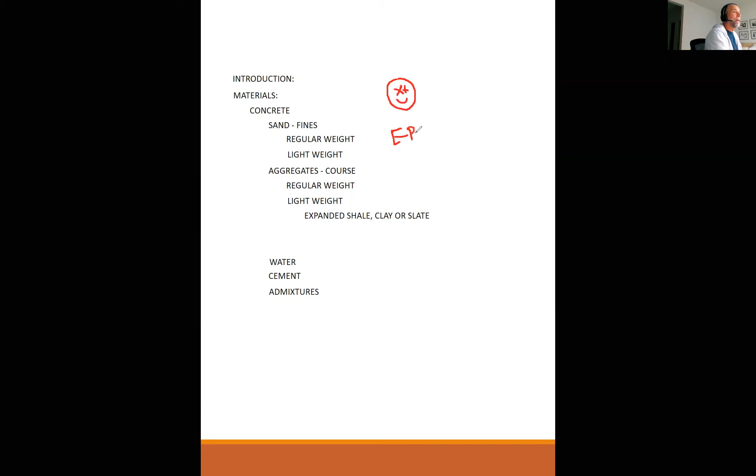So I am going to try to have most of everything pre-written out for the reasons I'm showing. I'll use this little spotlight to show you what I'm doing, and walk you through examples in this fashion. Please don't let that stop you from asking questions. If I feel a question needs some kind of diagram, or I need to point to or draw something, I'll do my best with this tool. But this is how we're going to go through them.

And all the PowerPoints will be uploaded to Blackboard, so you can peruse them at your own leisure anytime if you want to go back through examples line by line. And of course this is being recorded, so you can listen to me jabber as I'm going through the examples. But when we're in a classroom on a whiteboard, I would do this with a pen, talking to you as I'm writing, looking at each one of you in the eyes. I'd know who's asleep, who's paying attention, and who's completely, utterly, hopelessly lost, and I could use those cues to elaborate and clarify in the classroom.

I can't do that here. And you can probably tell it's frustrating that I can't do what I normally do as a teacher in this format. So this is the best we have.